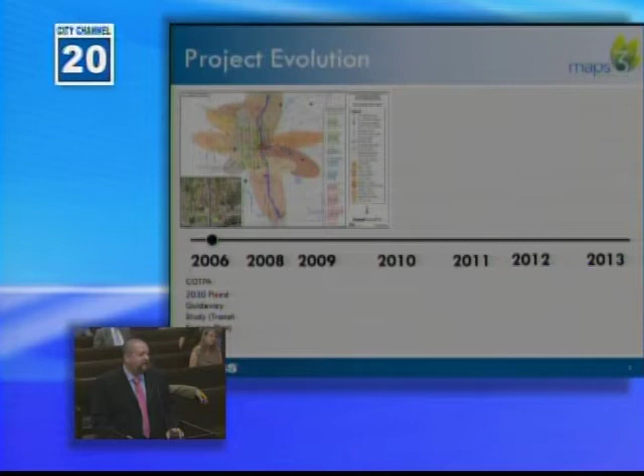Back in 2006, this all started with the approval of the fixed guideway study, done through COTPA, which was the 30-year transit plan for Oklahoma City and the metropolitan area. The plan recommended a series of transit alternatives, including bus rapid transit, commuter rail, enhanced bus, and a downtown streetcar circulator. In 2008, COTPA began the alternatives analysis with Let's Talk Transit.

This was a series of 7 public meetings with about 300 participants, and 1,100 online and in-person comments received from the public meetings. In 2009, the MAPS 3 election was approved, with streetcar being on that election.

In 2010, COTPA received the Tiger 2 planning grant, which helped look at items such as a health impact assessment, livability principles, and visualizations of the proposed streetcar, and that study is currently ongoing. In 2011, the alternatives analysis wrapped up with approval of the locally preferred alternative.

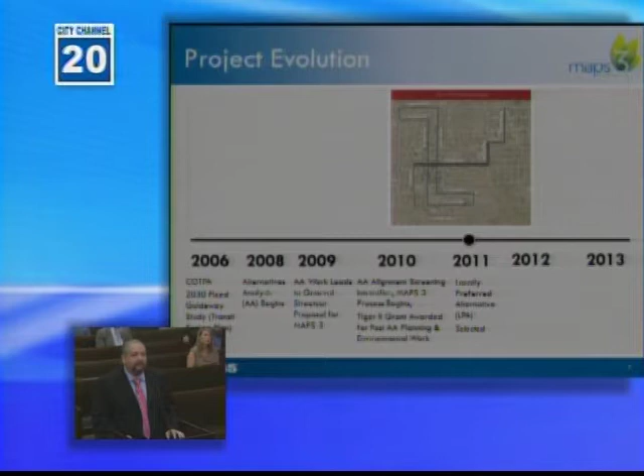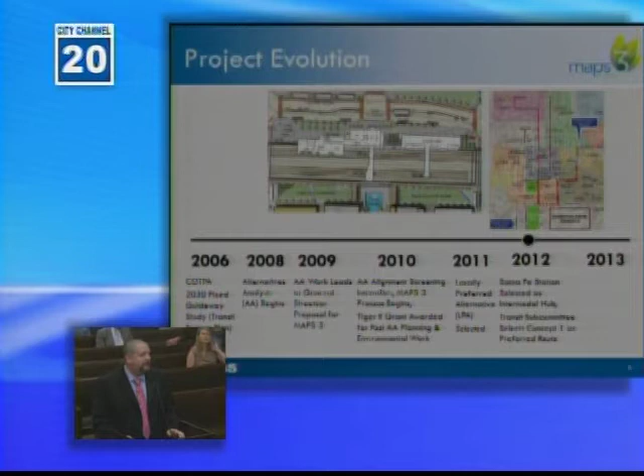Many of you have seen this. It consisted of 2 routes, one out to the Health Science Center and a core route from Midtown to downtown and Bricktown. In 2012, we had the completion of the intermodal hub study, which recommended Santa Fe Station as the site for the intermodal hub, and the MAPS Streetcar Subcommittee recommended Concept 1 as their preferred route.

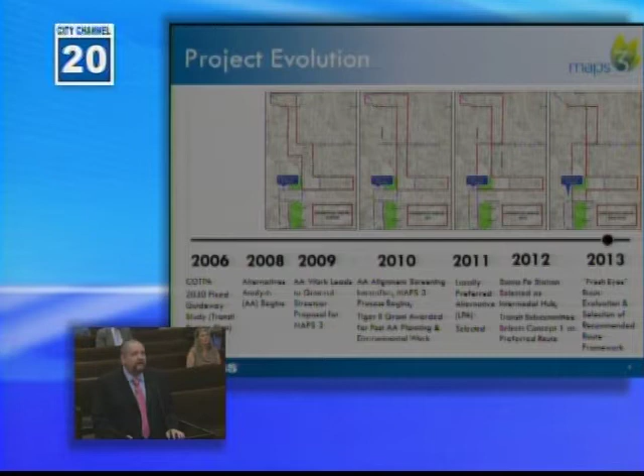So here we are today. Beginning of 2013, we began a fresh eyes route evaluation, and today we're presenting the selection of the recommended route framework. Our evaluation, as I mentioned, started off with the locally preferred alternative in Concept 1.

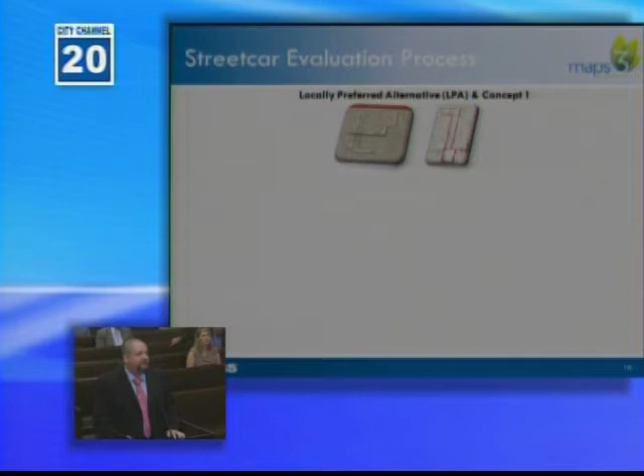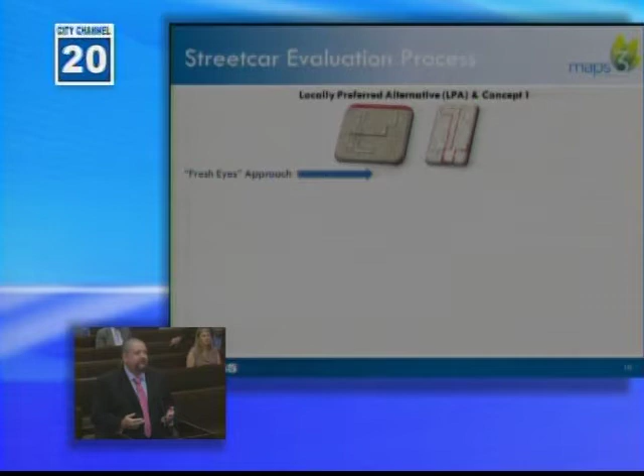Then we conducted a fresh eyes look. We looked at downtown and many possible route alternatives within downtown, and came up with 8 potential route options. From those 8 route options, we conducted our evaluation and came up with 4 conceptual route options as our short list, which we presented a couple months ago.

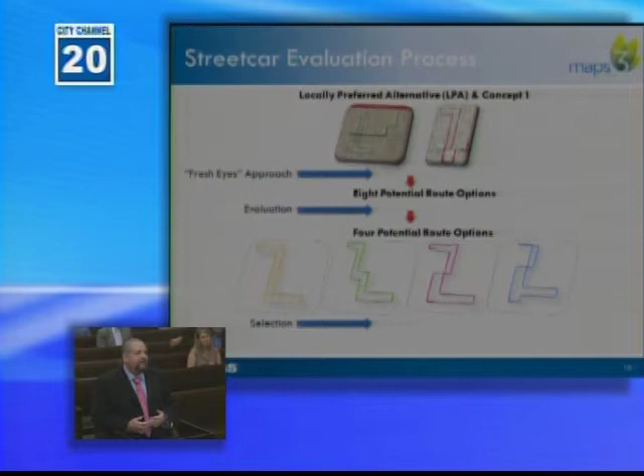In the past 2 months, we've had another second Fresh Eyes workshop, a public meeting, and input from our subcommittee, and we refined our evaluation to get to today where we have our recommended route framework. I'll turn it over to Mark.

I'm Mark Dorn with URS. It's a pleasure to be here. Good morning.

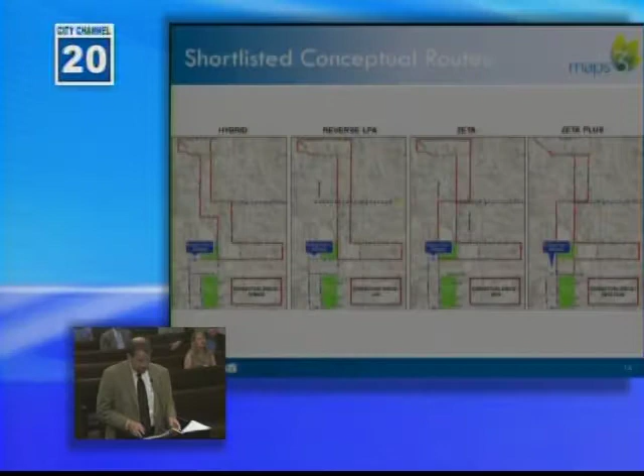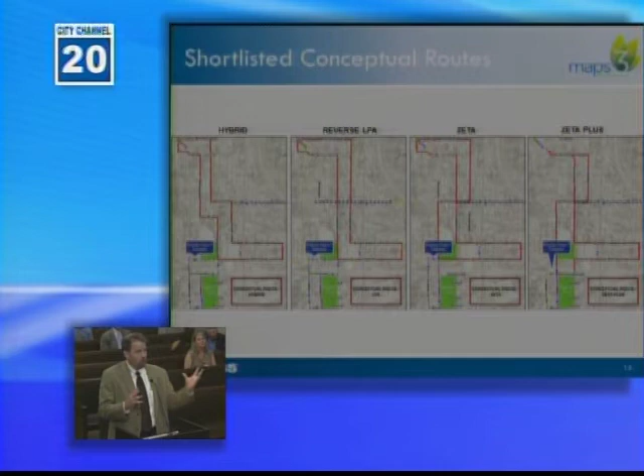So Lee mentioned the 4 candidate routes that we identified after the first phase. Just very briefly, the hybrid route was so named because it was a combination of some of our other candidate routes from the 8 we were studying. Basically, it served—we identified the need to connect to the transit center as a very high priority—and it also served the heart of Midtown and some of the economic development, but one of the detractors was that it missed the Broadway Automobile Alley.

The reverse LPA is essentially the same phase 1 that you saw before, but through the utility investigation conducted a year ago, because of some of the major Trigen trunk facilities there, if you reverse the direction, we were able to avoid those impacts and costs. There were also other factors with legibility that we thought reversing that direction would be more beneficial.

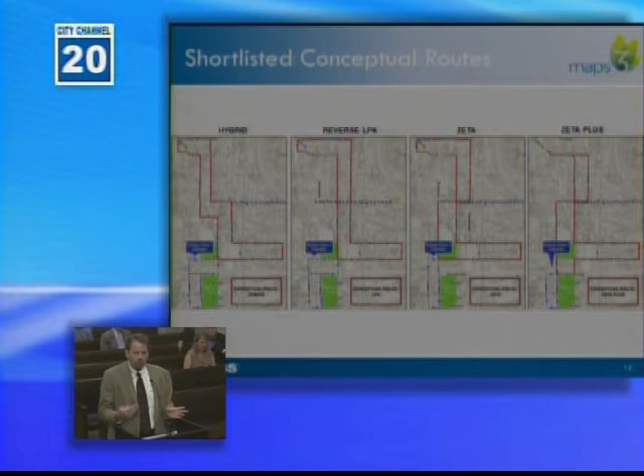But then we had the Zeta, which combined the benefits of connecting to the transit center and serving Automobile Alley, as well as serving the heart of Midtown. Through that initial review, we identified the Zeta Plus, which raised some questions of how important it was to serve the MAPS Park during that first phase. So those were the 4 candidates that we took to the second level of screening.

And what came out is what we call our framework to continue into project development. It is the Zeta route, and essentially the reasons are because it is the route that best connects all the major destinations, including the downtown transit center, Automobile Alley, the intermodal hub, and some of the MAPS projects as well.

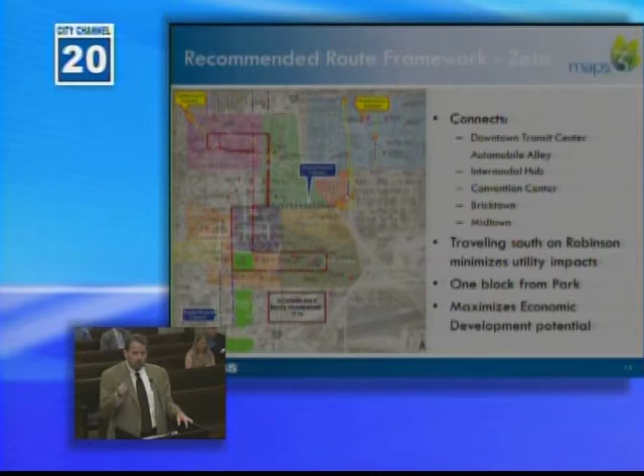Traveling southbound on Robinson in the heart of downtown, between 4th Street and Sheridan, that's where all the Trigen facilities are. If we're traveling southbound, we'll be able to avoid those impacts. We're 1 block away from the park, and we feel that is sufficient for phase 1, knowing that phase 2 can complete that connection. There's also an added benefit that with the Zeta Plus we would have surrounded the convention center site, which would add complexity to its construction.

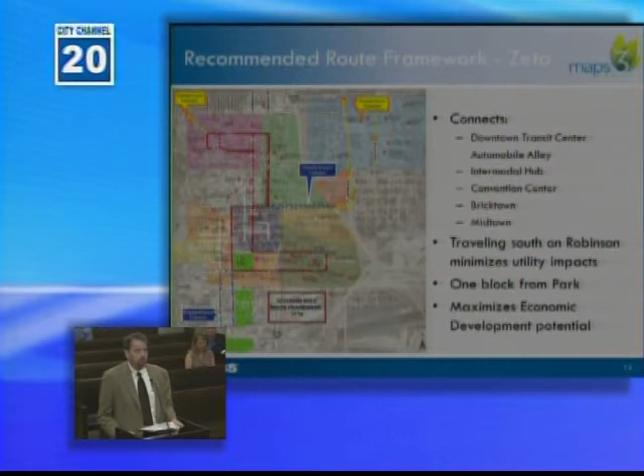Because we're serving Automobile Alley and Midtown, we're really maximizing the ability to catalyze development. So the alignment is 4.5 miles of single track.

Right now, we didn't do detailed cost estimates, but we projected the work done before on the alternatives analysis to make sure we're in the range, and we're projecting a cost of $99 to $109 million. But I've built 12 of these projects, and we're committed to meet that $94 million phase 1 budget, and we have a lot of tricks up our sleeves, a lot of lessons learned that we think we can accomplish that for you.

We call this a framework because we're not quite done with the alignment selection. There's a couple options we're carrying forward that we'll study in the next phase of analysis, and essentially they're in the Midtown area. South of Midtown, the alignment is pretty set according to our recommendation: southbound on Robinson, turning into Bricktown on Sheridan, wrapping around and coming westbound on Reno, heading north on Hudson, serving the transit center, then cutting to the east back to serve Midtown.

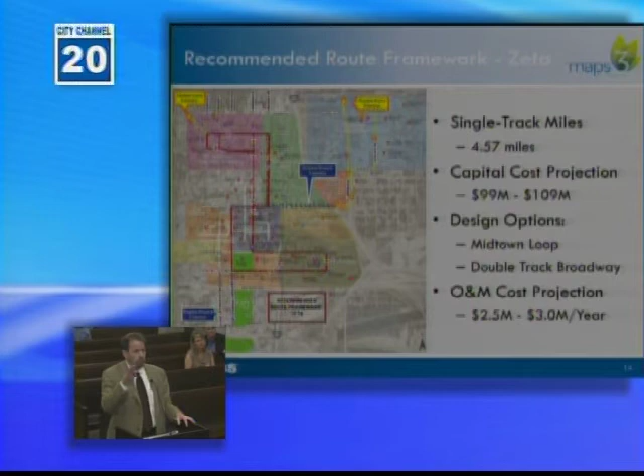The other option is how to serve the Midtown district. One variation of the LPA advanced in 2011 had the service on 12th or 11th and 13th. We actually pulled our alignment, if you look closely, a little bit further south. We think there's more economic development potential on 10th. We want to make sure there's a benefit to serve St. Anthony campus directly.

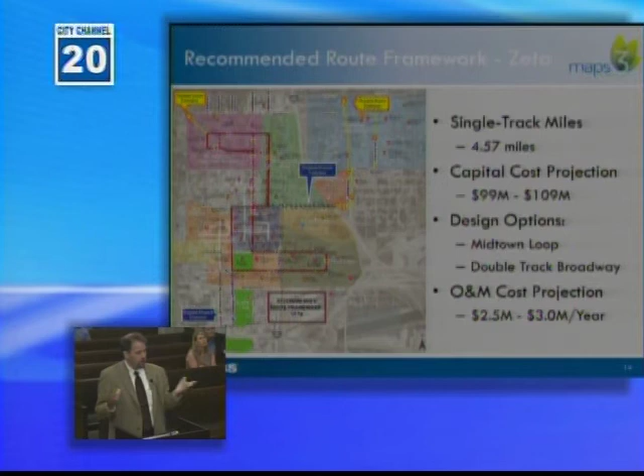So the options we're going to look at are a couplet, one track on 10th and the other on 11th, forming a loop as the streetcar terminates, which could be clockwise or counterclockwise. Another option is what we call the tail track option, where 2 tracks will turn onto 10th, head up to the circle at Walker, and terminate somewhere in that vicinity of the traffic circle.

So those are our design options, and as you see, our cost projections for the operating are consistent with the LPA, which are in the $2.5 to $3 million a year range.

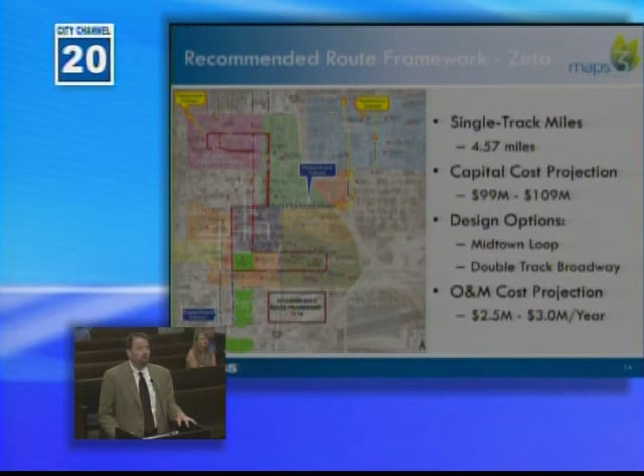Lee, you want to talk about the main facility? So in conjunction with studying the route alternatives, we also looked at potential areas for the maintenance facility.

Some of the criteria we used to evaluate our maintenance facility sites: we looked at the alignment, how the site relates to the alignment, the distance of track needed to build from the end of the line to the maintenance facility, traffic impacts, and how the location supports future route extensions. We also looked at facility requirements, both short-term and long-term, making sure it can accommodate what we're planning in phase 1, but also phase 2 and possibly future extensions down the road.

Urban adaptability: how does the site fit into the urban context, the existing land use there today, how does it fit with zoning requirements? We also looked at any cultural and historical impacts and tried to make sure we avoid those with the maintenance facility site. And also real estate — making sure there's no displacement of businesses or residents, and that the site does support economic development.

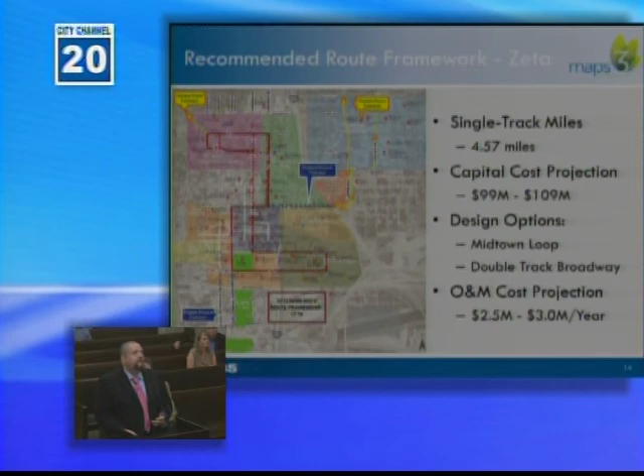Wrong button, wrong way. So we have narrowed down our sites. We have 4 potential areas for the maintenance facility. 2 are located in Bricktown, north of, in between the rail line and the parking lot just north of ACOG and the Bricktown Police Station. There's a site to the east of Mickey Mantle and a site to the west of Mickey Mantle.

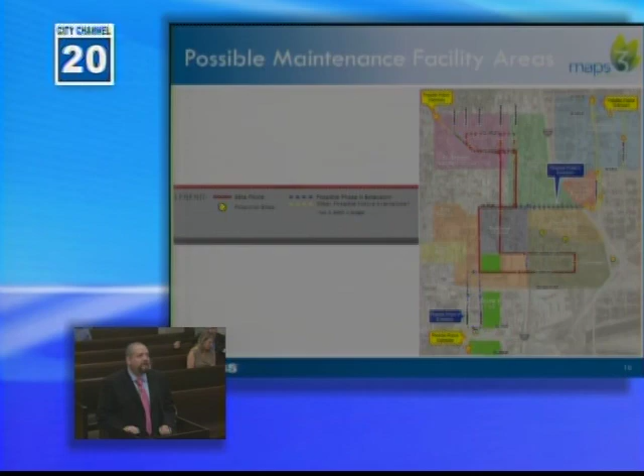So our next steps are to determine the vehicle propulsion — there's a lot of discussion of whether the vehicle needs to be completely off-wire or is it an on-wire, off-wire vehicle. If it is, that's called a hybrid vehicle. So if it is a hybrid vehicle, where will those sections be where the vehicle is on-wire or off-wire?

We need to finalize the storage maintenance facility location and begin design of that facility, and also get into preliminary engineering, which includes looking at those design options and refining them and coming up with the final route. Then we get into rail and vehicle procurement and develop an economic development plan for the corridor itself.

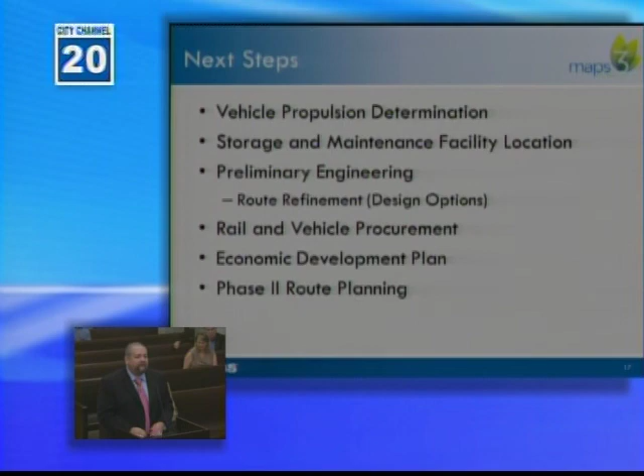So once we have the preferred route, we'll develop an economic development plan for that route, showing how the city can entice and spur economic development, and then get into phase 2 route planning to see where that second phase is going to go. So with that, we'll be glad to answer any questions you may have.